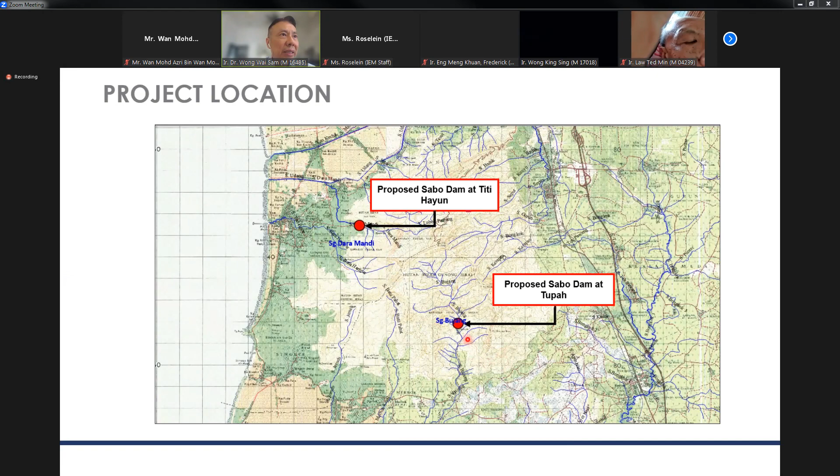So after this incident, the government proposed 2 locations to construct the Sabo Dam. One is at Titi Hayun, the other one is at Tupah. As we can see from the location, at Titi Hayun the river flowing through is Sungai Dara Mandi, while the Tupah Sabo Dam is for Sungai Bujang. So these are the locations for the 2 Sabo Dams.

The objective is to plan, design and construct Sabo Dam structures upstream of Sungai Dara Mandi, adjacent to Titi Hayun. Titi Hayun is a very famous resort area. Due to this incident, the resort area was closed for about 2 years; recently it opened up to the public again. The other one is upstream of Sungai Bujang, where there's a SADA water intake. So it's also a very critical location, to protect the intake from damage by debris and mudflow. These are the 2 locations earmarked by the government to implement this project.

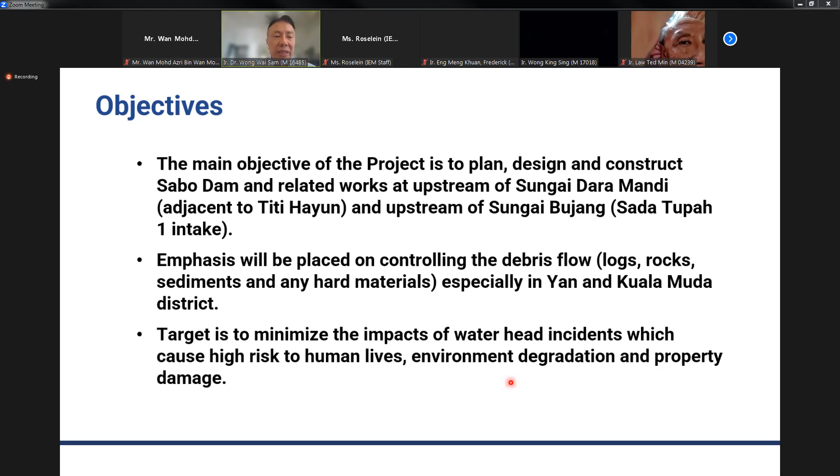The emphasis is to place structures to control the debris flow, including rocks, logs, sediment and any hard materials, from flowing downstream and causing major damage to the populated area. So the target is to minimize the impact of water head incidents, which cause high risk to human life, environmental degradation and property damage, as you can see from the photo just now.

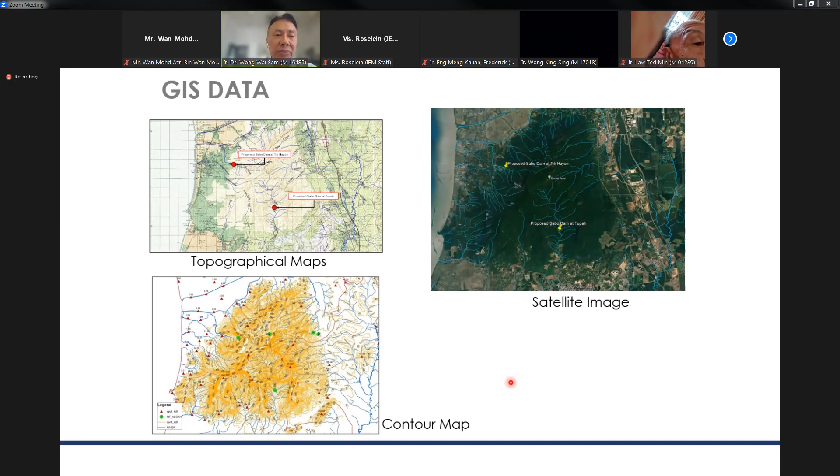Data collection, I think, is quite standard. We need to collect the rainfall data, then the satellite images, the topography maps and contour maps to get the catchment characteristics of the area where we are going to locate the structures. Then we fly a drone along the river corridor to check suitable areas, because the area is quite steep and not easy to access. So the drone helps a lot, where we can capture video and images to check the best location for the Sabo structures.

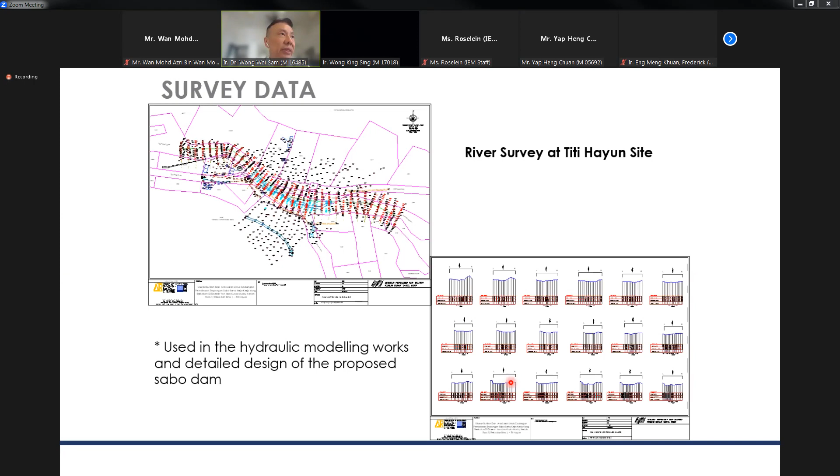Survey also: after we identify locations through drones, we do a ground survey, engineering survey, to get the cross sections and site survey for these two locations. Then also the SI, site investigation, to determine the soil condition or rock profile along the proposed location, later for the design of the foundation, and also to check for seepage problems if there are any.

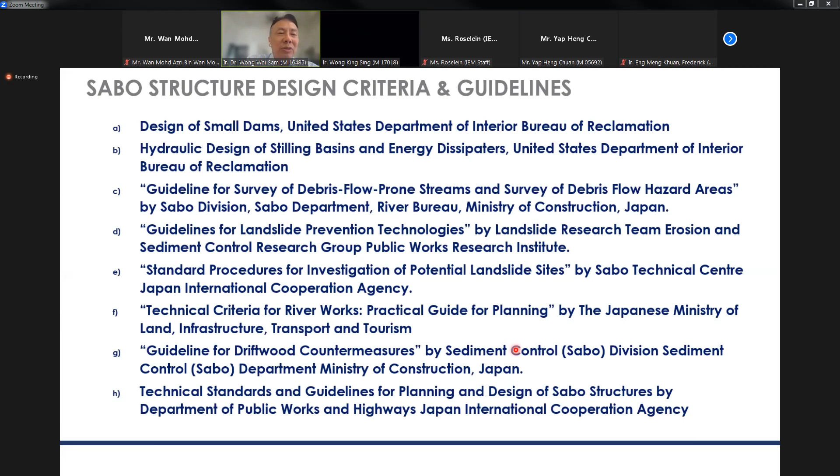Design criteria. I think in Malaysia there's still a lack of design criteria for these Sabo structures. That's why we refer to a lot of guidelines from overseas, especially from Japan. These are the guidelines that have been adopted or adapted to local conditions. Japan is quite famous for this. Sabo, the name, is from Japan, and the meaning is control of sediment.

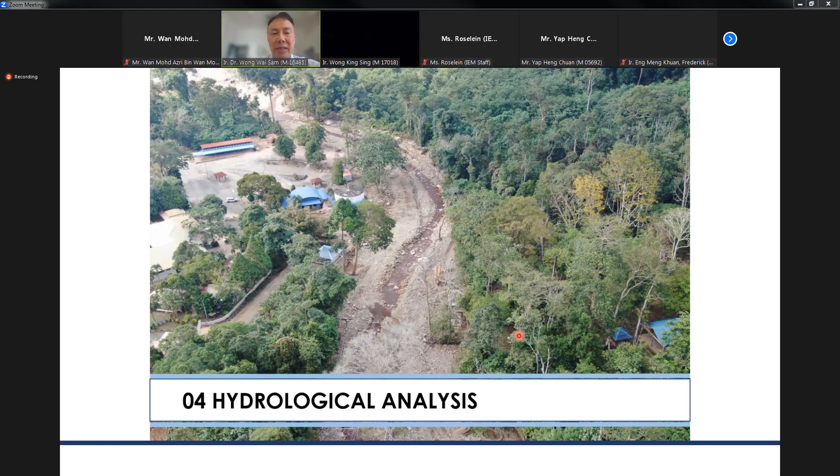So from all these data collections and the guideline, the first thing we need to do is establish the flow of water. So standard, I will go through this quickly. It's just to demarcate the catchment, then get the design rainfall intensity, then get the catchment characteristics. Then we use some hydrological procedure to estimate the runoff.

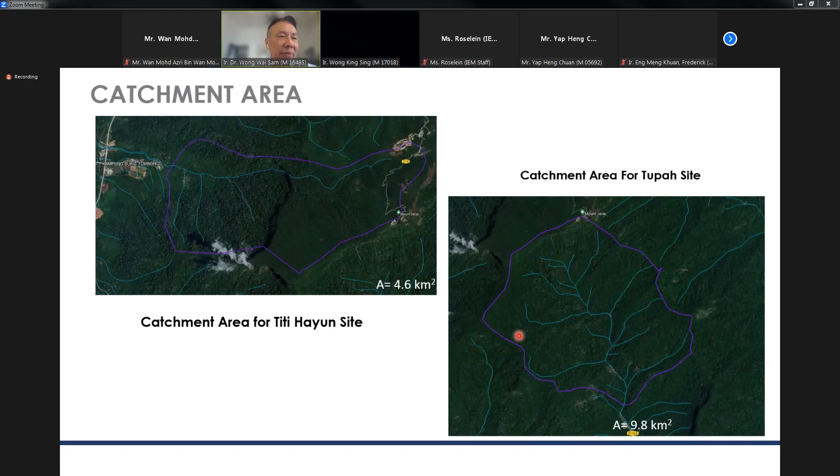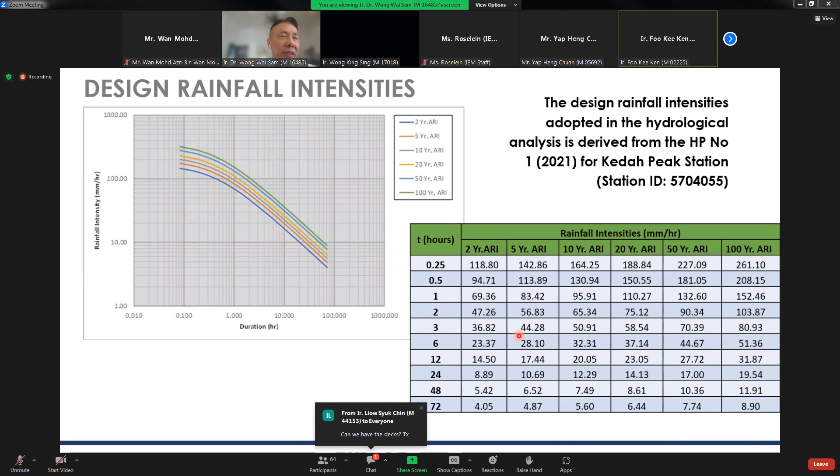Then for the runoff estimation, we have used two methods, HP5 and HP27. These are suitable for rural and undeveloped areas. I think you should know about this, HP5 and HP27, for those who have used it before. And the other one we adopted is the rational method proposed in the JICA guidelines, which we use to compare with HP5 and HP27.

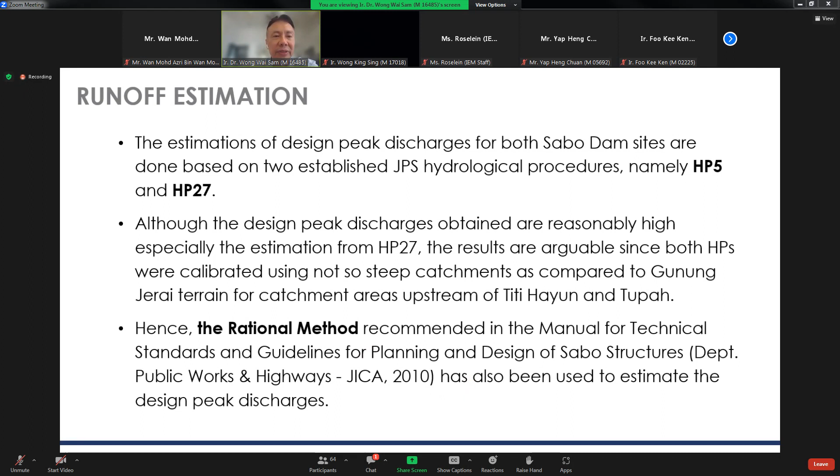From the computation, we can see that the rational method gives the highest flow peak. I think that is what most consultants will get also - if you use the rational method, normally you get a higher Q peak.

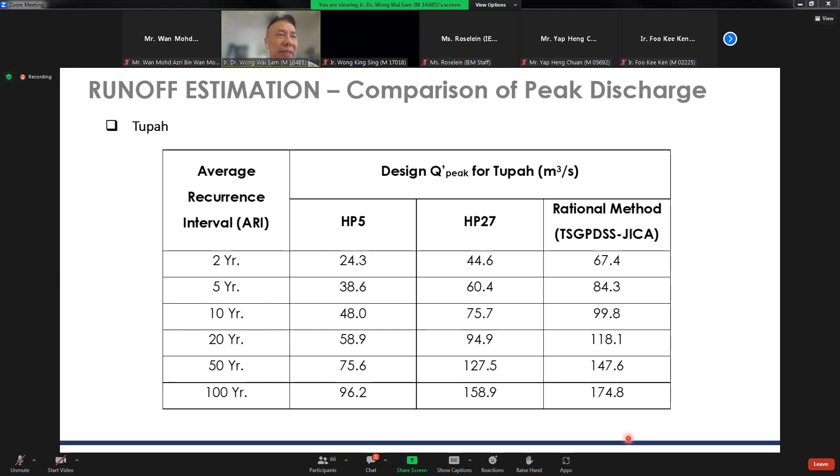So for Tupah, the same characteristics apply. This is the listing of the various return periods, and this is the Q peak from hydrological procedure number 5, giving the lowest. HP27 is in the middle, higher, actually much higher than HP5, but the rational method is a bit higher still. From the results, we can see that the rational method is almost 90% higher than HP5, and HP27 is lower by almost 15% compared to the rational method for the 100-year return period.

Actually, the rational method provides a higher Q because they adopted a runoff coefficient that is also high, as recommended in the guideline. There's a possible reason for this also - in Japan, most of the land use is very rocky because of volcanic type soil, not much plants or vegetation in the area there. So they recommend a high runoff coefficient - 0.8 was adopted in this case.

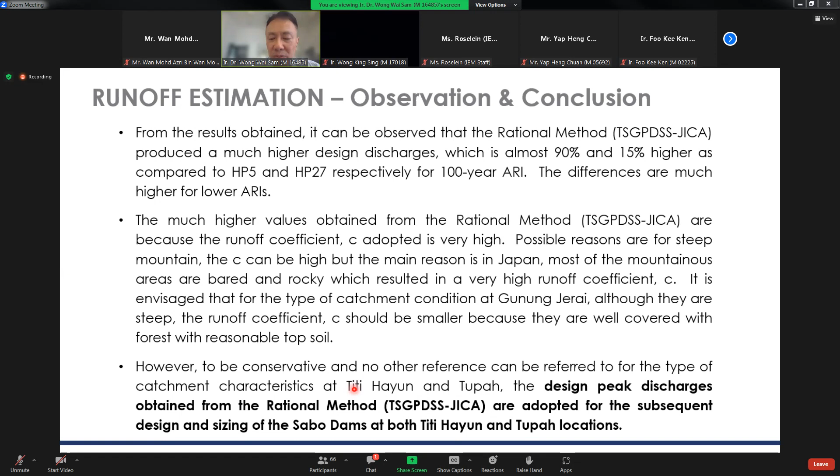But because of the uncertainty, in this design we have adopted the rational method as the higher value to design the sizing of the Sabo dams at both Titi Hayun and Tupah locations. Okay, Sabo dam sizing.

In this project, the recommended types of Sabo are closed Sabo and open Sabo. Just to explain a bit - closed Sabo means the Sabo dam is intended to trap the sediment also, but open Sabo is just to trap the debris and bigger size rocks. So in this case, we do not intend to trap the sediment, but only the debris like tree trunks and boulders.

So this is the function that was adopted - this design criteria was adopted in this design. And with this structure, it would not only trap the debris, but also reduce the flow rate. With a Sabo structure in front, the flow velocity here will be greatly reduced, and when it reduces, it will help to deposit sediment.

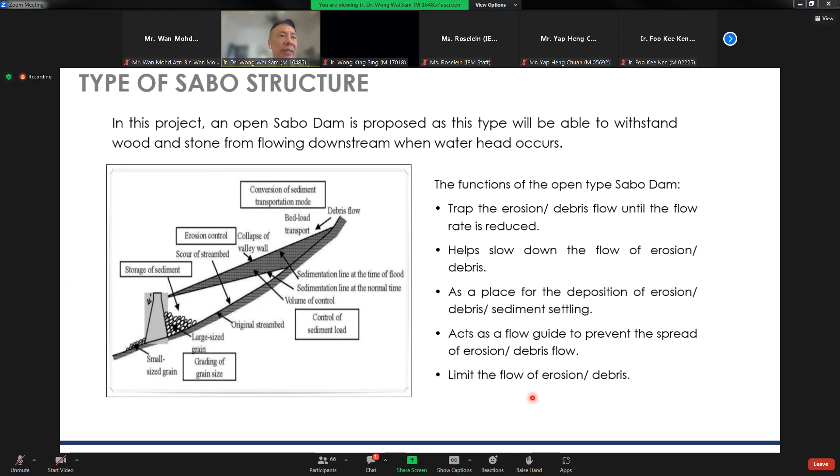Although it's an open Sabo, after a while the Sabo will also actually trap sediment behind it because it slows down the flow. So it acts also as a flow guide to prevent spread of the eroded area, eroded sediment, and also debris, and to limit the flow of the eroded material and debris. These are the functions of the Sabo.

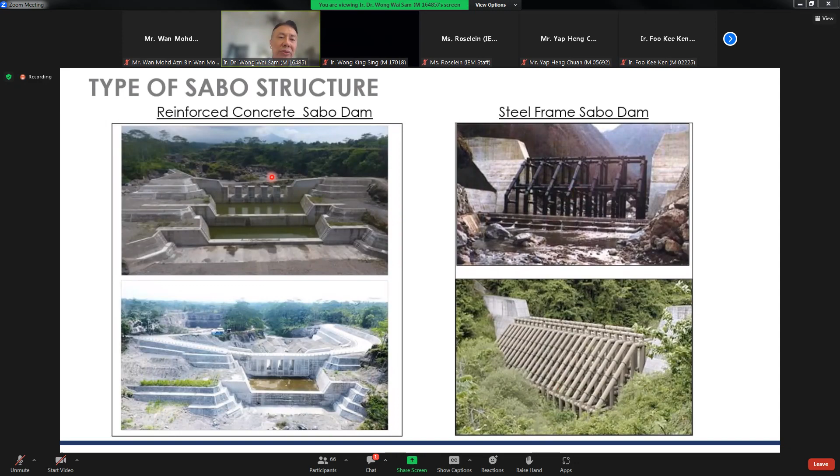So we also considered why we finally adopted the concrete Sabo. I think both are effective, but for construction cost, we estimated the steel Sabo will be a bit higher. And for structural stability, because the steel frame is light, we need a very strong foundation, whereas the RC Sabo also acts as a gravity dam to retain it, so in terms of stability, it's more stable.

Construction duration, I think the steel structure will be much faster because most of the members will be fabricated in the factory and then mounted at the site. Construction difficulty, I think steel structure may be a bit more difficult because you need to transport the fabricated steel columns or beams to the site, and it's quite heavy when you want to install it.

Debris maintenance is another issue, because you can observe the steel structures where tree trunks can be trapped in between. If trapped, it's quite difficult to take the debris out from the steel frame compared to RC structures. Wear and tear, I think steel is definitely easier to degrade because it's subject to corrosion.

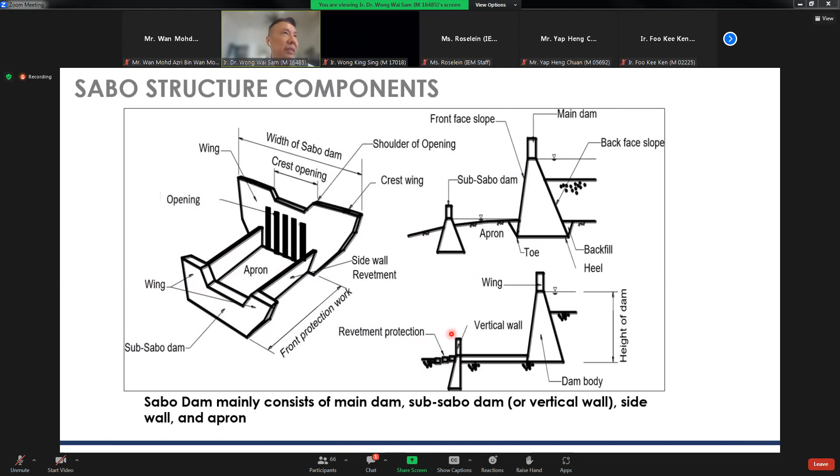This is basically the adopted Sabo configuration for this project. The first thing is to estimate the debris volume. I will not elaborate much, but basically we estimate the length of the stream, and there's a way to estimate the volume of debris and the collapsible volume that goes into the channel itself. From this we know the length of the stream, the width, and everything.

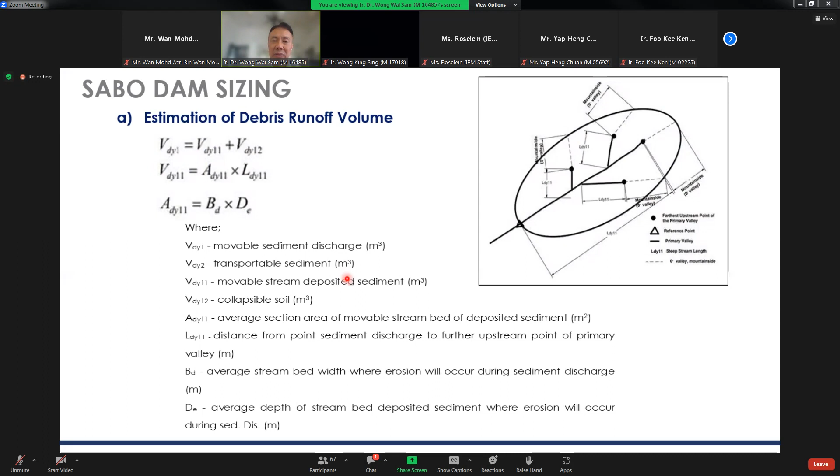From there, we actually estimate the volume of debris that will be going to this intended location for the Sabo. Definitely, the more data you collect, the more accurate the volume estimate is. But at this moment, we just base it on the stream length and these factors to estimate the volume of debris that is coming down.

Then the other thing is we need to estimate, after we know the volume of debris that will wash down from the event, the volume of the Sabo that can trap this volume of sediment, debris and boulders coming down.

So actually the location of the Sabo is very important. The more gentle the riverbed is, the bigger the volume available. That's why, as I mentioned, we have to do the drone survey to get a good location. The wider the river channel, the gentler the river channel, the bigger the area you can have for trapping.

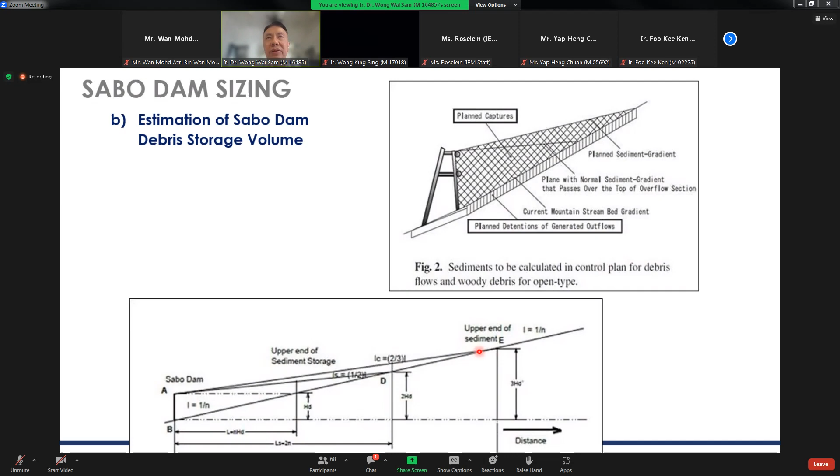Definitely, we assume that the Sabo will be maintained very well, where the Sabo has to be cleared whenever there's another event where debris has washed down. But sensitivity analysis is also carried out in case the Sabo is quarter filled or half filled or whatever - that can be done in the modeling part.

Then we actually estimate the spillway on top of the Sabo. We don't want the Sabo to overspill everywhere across the dam itself. We need to allocate a location where the Sabo overspills if the event is much higher, or if there's no time to empty the debris out. Then if it's full of debris and boulders, the water may overspill the Sabo dam.

So we design the weir accordingly, to compute what is the return period and estimated flood level - let's say in this case, it's 100 years return period - and what is the overspilling. We want the weir's downstream to be your apron, so that it controls the hydraulic jump or dissipates the energy when the water overspills the weir here.

And there we design the plunging pool, where actually when the water overspills, it drops into this apron rather than outside the apron. There's a formula to compute the length of the apron required, and the width of this apron and the sidewall will be based on the weir width that has been estimated from the discharge.

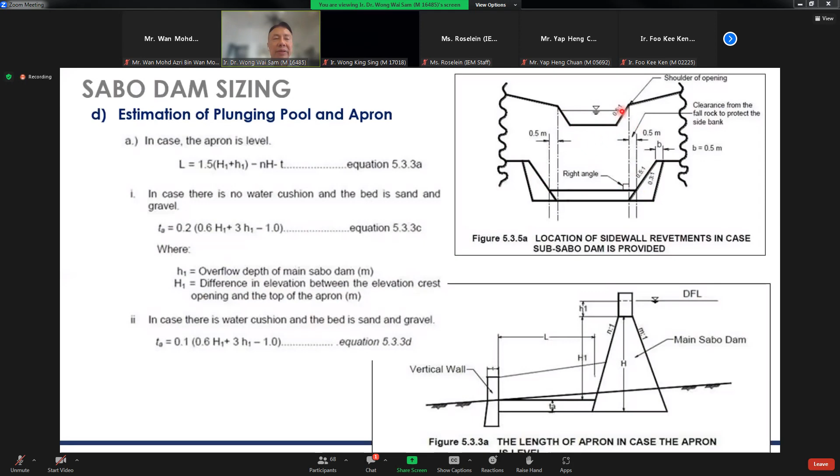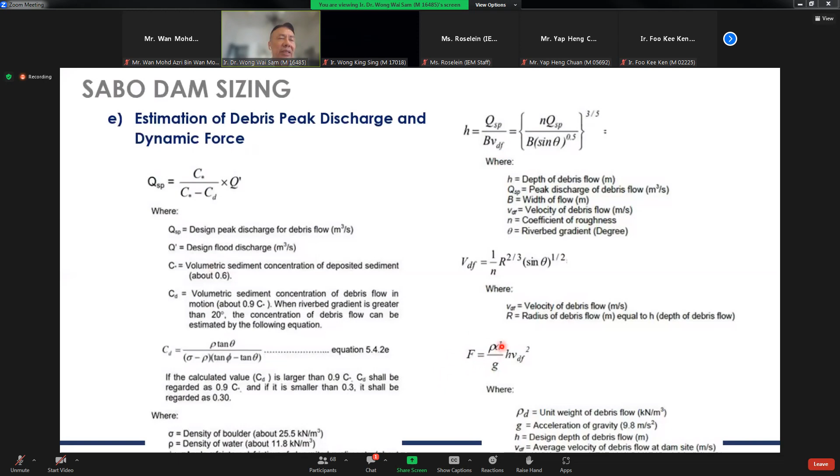This is the height of debris, the depth of debris estimated using the peak discharge, and this is the velocity of the debris flow. From there, the H and V with other parameters, we compute the force that acts on the Sabo structures.

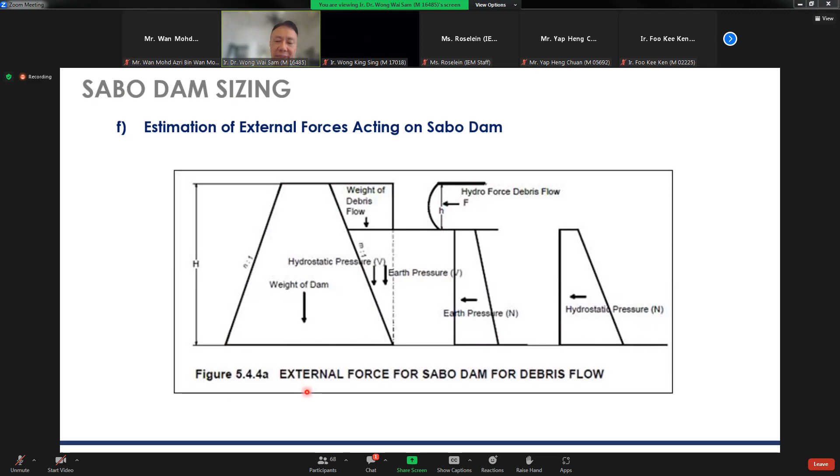After all this, we hand over to the structural engineers and geotech engineers to design the main structure and the substructure. So this is basically how we size up the Sabo dam. This dimension has been estimated from the formula and also the computational method, the guideline provided.

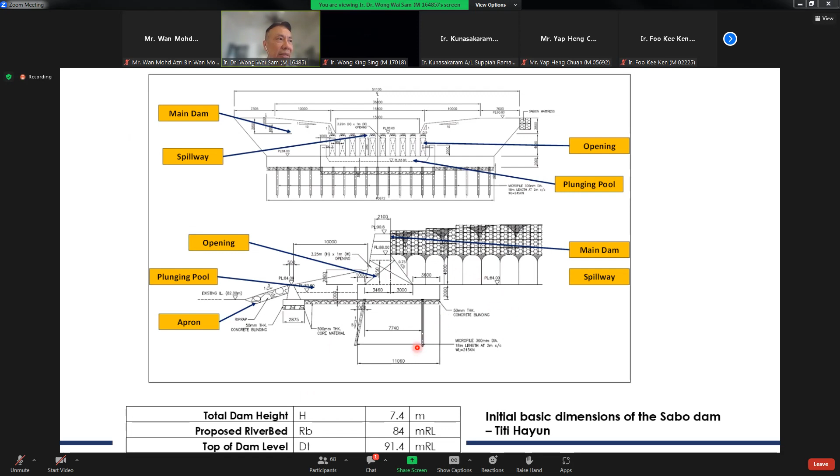This is for Titi Hayun and this is for Tupah. To summarize, the catchment area for Titi Hayun is this one. The dam height estimated is 7.4, based on the width of the river channel and also the volume required. Then we determine the height of the dam. The volume of debris we want to control and the width of the river channel at the location of Sabo determine the height of the Sabo dam. Then the proposed bed level, top dam level, what is the reduced level.

This is then the overspill weir, this is the overspill weir level. Opening, how many slots we want for the open Sabo. Then this is the storage volume available, 22,000 meter cube. For Tupah, it's bigger and higher the dam, this is the value. The storage volume of debris computed is 41,000 because the catchment is almost double that of Titi Hayun.

After we size up the dam based on the guideline provided in the formulation I presented just now, we also put into this model: we model the debris using the Kanako debris flow simulator. This software can be downloaded free from the internet. It's developed based on theoretical principles of debris flow and supported by laboratory experiment and field data from Japan itself, and there's a 1D and 2D model.

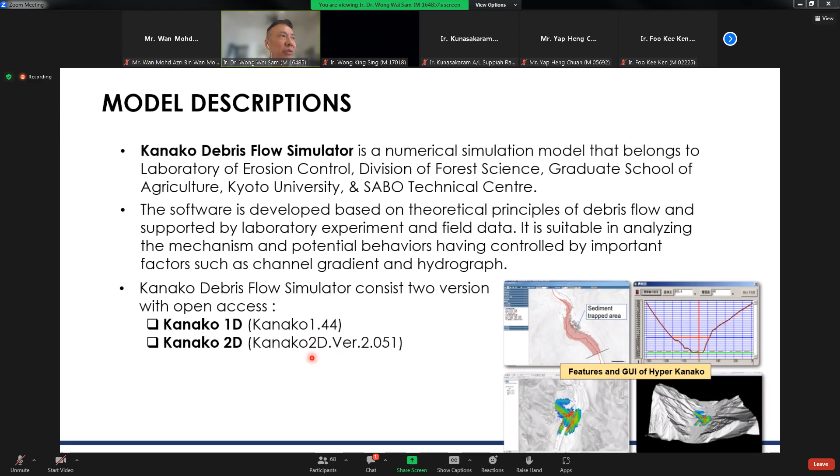The objective is to develop and carry out simulations using this model. The aim is to estimate the debris flow discharge along the slope, to verify the effectiveness of the designed Sabo dams at Tupah and Titi Hayun. That means, having sized it out just now, we then use this model to check how effective it is to retain the debris.

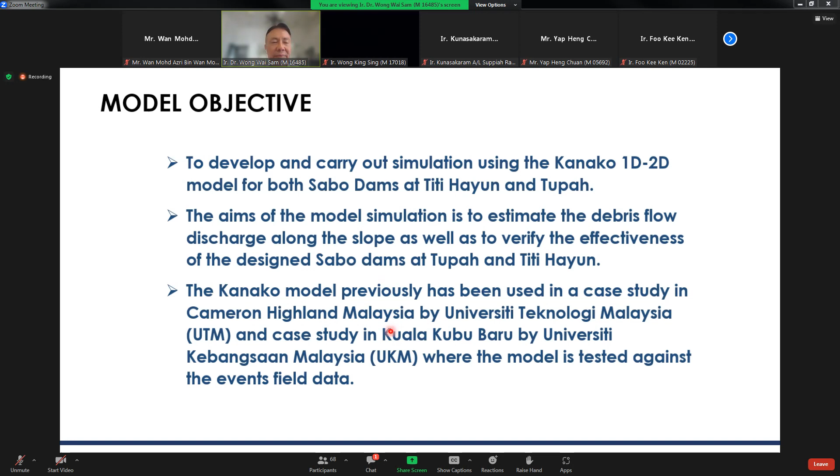This model has also been used by UTM for the Cameron Highland studies and also by UKM. So basically, the flow chart for this Kanako modeling is: we need to know the landform, as mentioned. We need to know the cross section, the view, and all these things along the stream itself, and also at the Sabo structures. Then, after the landform, we set up the model itself.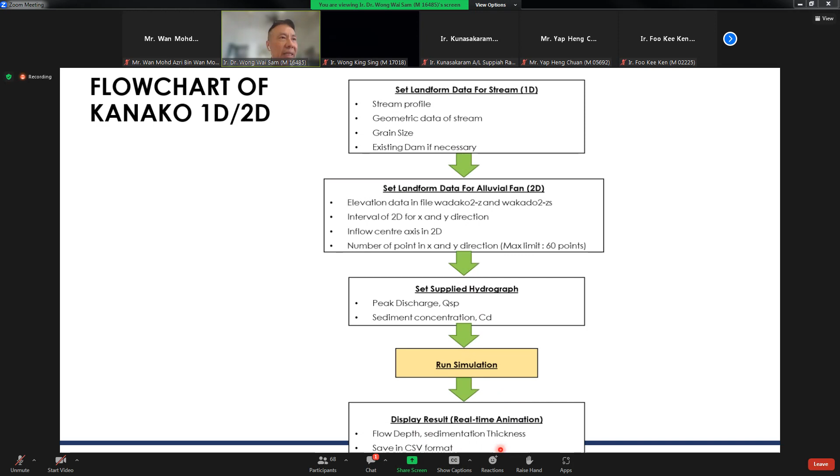Then we also apply the hydrograph, that means the peak discharge and the sediment concentration, the debris flow concentration. Then we run the simulation, and from there we get the flow depth and sediment thickness. That's the results, and this is the input.

This is all the input, all from the survey itself. Then this structure is what we just computed. Then with the hydrograph, we put it in. We supply the initial thickness of the movable bed. This is all estimations from the site investigation. We estimate how deep the sediment thickness reaches the hard ground, then the points we want to estimate the flow.

Then we see the output, which is the discharge hydrograph displayed. Later I'll show you the results. So this is the setting up of the model, the 1D model and 2D. Just now, this is for the Sabo observation location. We have two locations: one is Sabo, one is upstream of the point, and the other one is downstream of the point.

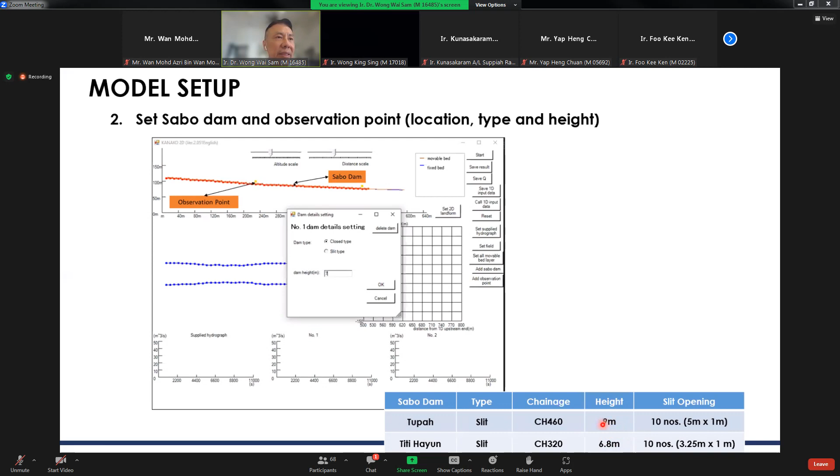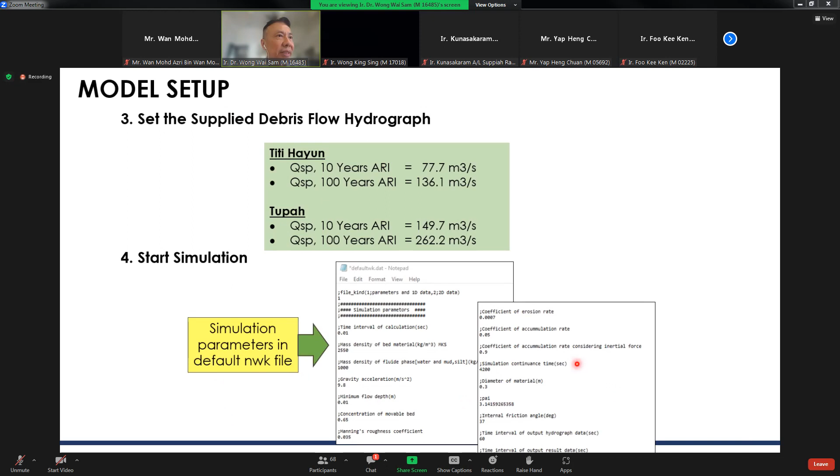To compare, we put in all the height of the Sabo dam as we actually estimated just now. From there, we put in the discharge for 10 years and also for 100 years, as computed by the formula just now. This is for Titi Hayun, this is for Tupah. Then we put in the simulation parameters, and from there the results come out for 100 years and 10 years.

Okay, we can see that for Titi Hayun, this is for 10 years. The upstream of the Sabo, this is the hydrograph coming down. And after the Sabo, it becomes from almost 15 meter cube per second to 6.

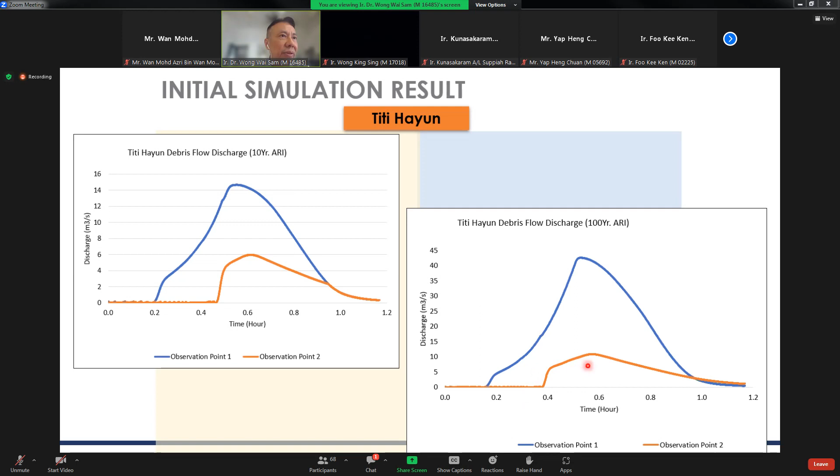For 100 years, it retained more because I think it's an open Sabo, from 43, 42 meter cube per second it can reduce to 10. Okay, these are the results. For Tupah, I think it's a similar observation.

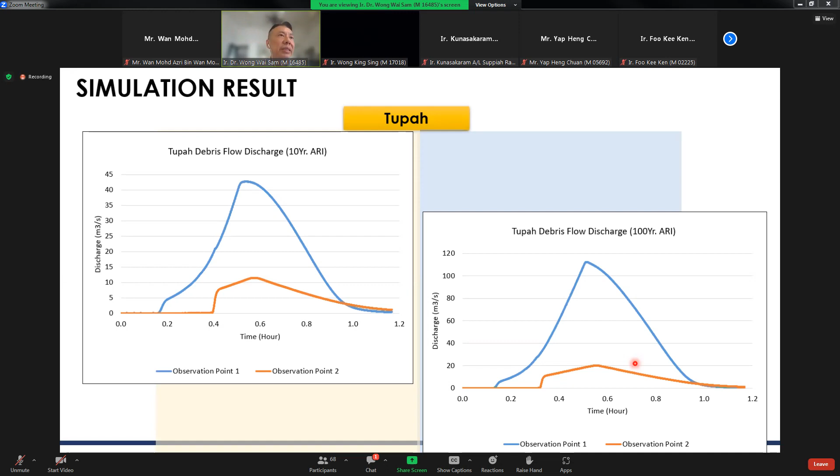You can also observe that the percentage of reduction of the debris are even higher. The models have demonstrated that with the implementation of Sabo structures at the proposed site, the debris flow discharge at the downstream stretches of the river can be greatly reduced. Let's say a similar event happens again after the Sabo structure, the debris discharge from the dam can be controlled and reduced to manageable levels.

This modeling can also be used to do some sensitivity analysis. Let's say the Sabo is half full. We can change the landform of the model by filling up the upstream of the Sabo with some sediment to increase the bed level. Then we can see how much it can trap if it's half full, quarter full, or so. The modeling can simulate situations that provide some indication if maintenance cannot be done, what the consequences can be if it's half full, quarter full, or three-quarter full.

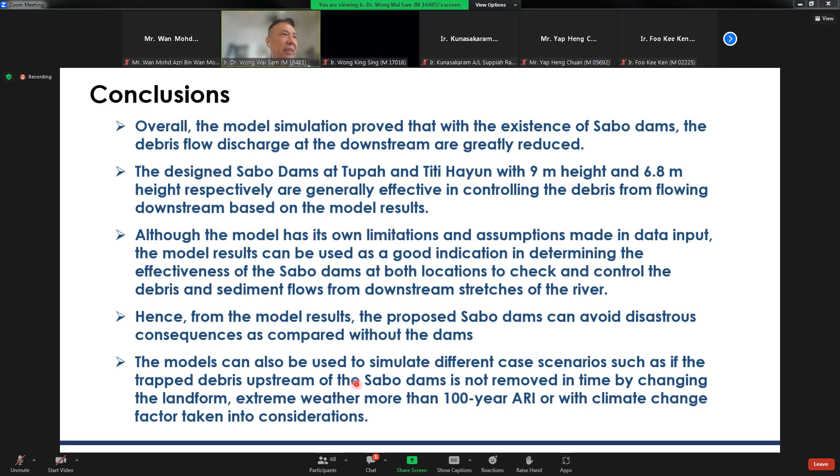As mentioned, we can also simulate for different scenarios, or even climate change.

Here we just want to show some layout of the completed structure itself.

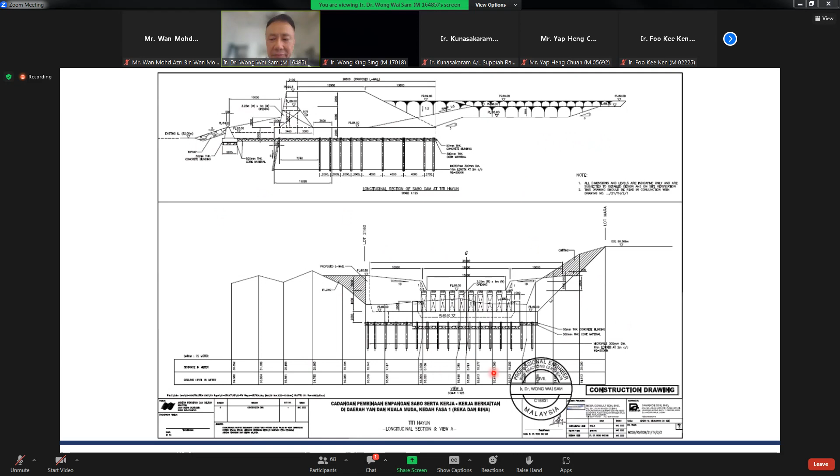And this is for Tupah, a similar configuration. But for Tupah, as I mentioned, there's a Sada water intake. Last time, without the Sabo, it was located around here. But with the Sabo, we actually created another storage for the Sada water intake downstream of the Sabo dam, so that this intake will not be damaged by any debris flow, because it's controlled by the structure itself.

And we created a pool at the side here, where in normal times water can, from this plunge pool, add additional storage for water supply purposes also, with these support structures.

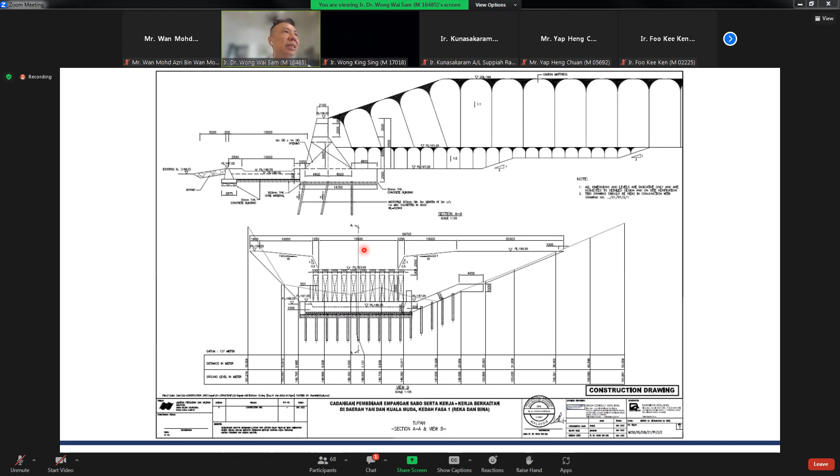This is a section and front view of the structure itself, and this is the completed structure looking upstream. We are standing downstream looking upstream. This is the apron. This is the open Sabo.

I think this is Gunung Jerai up there. And we have some telemetry, siren, and warning systems also.

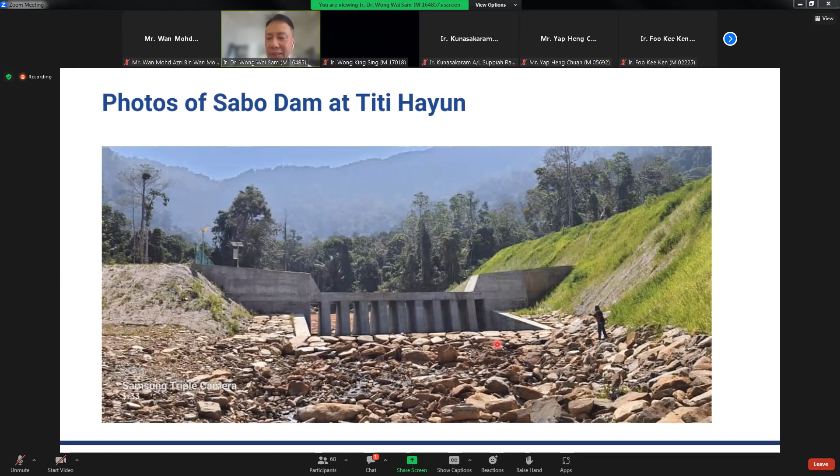This is from upstream looking downstream. This is the storage area of the Sabo.

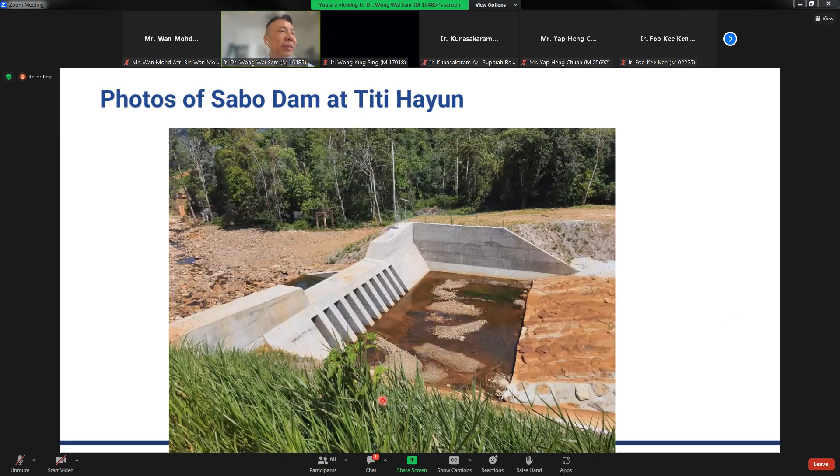And this is another view, standing on the left bank of the river. Okay, this is the downstream and this is the upstream. Okay, and this is Titi Hayun. As mentioned just now, there's a pond here created for Sada water intake.

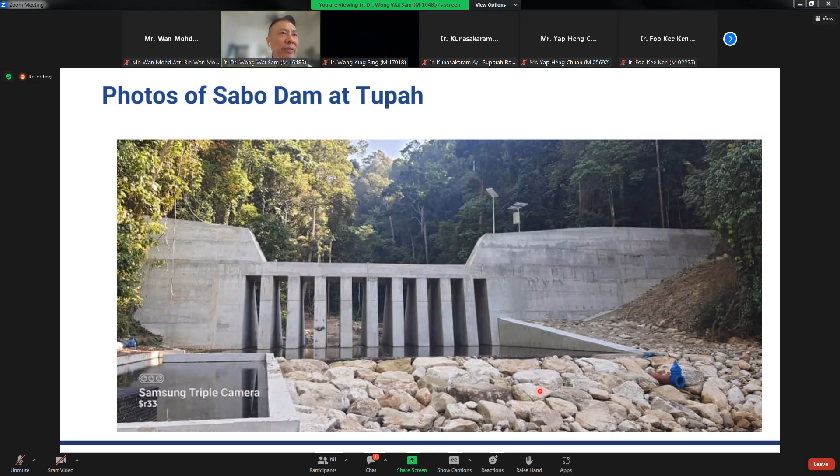Okay, this is the telemetry system. We also have a monitoring system for the integrity of the structure. If there's a big movement, then I think it will be detected. So this is the apron, and downstream of the apron will be protected by riprap. This is a plunge pool, and this is looking from upstream to downstream.

So basically, this concludes my presentation. Thank you for your attention, everybody. I hand over the floor back to Engineer Chow.

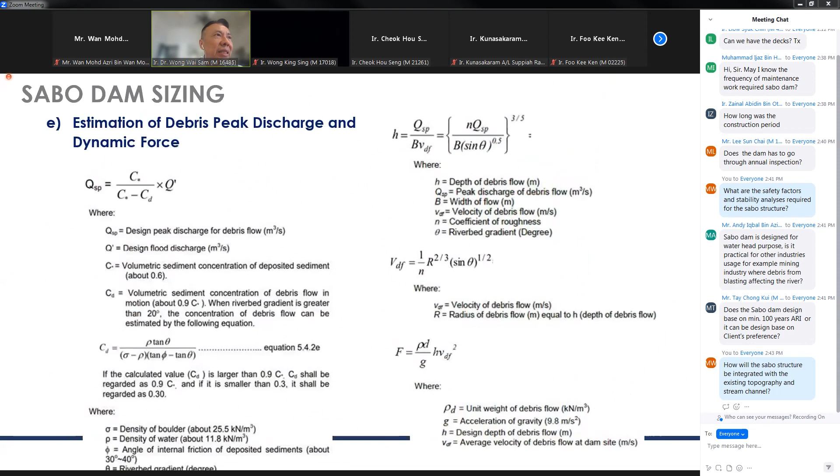And on top of that, let me just go back to the forces. There's also a dynamic force acting on the structure itself. So this is the most critical force. These are the forces recommended to be considered in checking the stability of the dam itself: the hydro force of debris, which I just showed you the formula for, then the weight of the debris, the earth pressure, hydrostatic pressure. All these act to compute the requirement for the stability, overturning and sliding of the dam itself.

Okay, thank you. We move on to the next question from Mr. Andy Iqbal. He's asking, Sabo dam is designed for water head purpose. Is it practical for other industries' usage? For example, the mining industry, where there's debris from blasting affecting the rivers. I think definitely, because Sabo structures are designed for whenever there's heavy runoff from a catchment that consists of a lot of loose material.

For the mining industry, you don't need a massive concrete structure. We call it Sabo structures; they don't need to be very big. It's just like when you design your sediment trap. You can control at source with a smaller one. There's something in the market like a cage, but you need to anchor it properly to hold your boulders and rocks from going downstream of the river. There are smaller Sabo structures, not dams, to control the debris from smaller catchments.

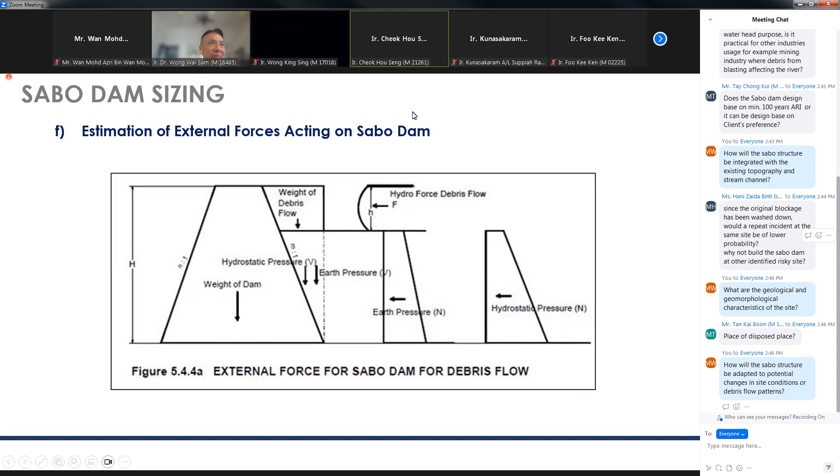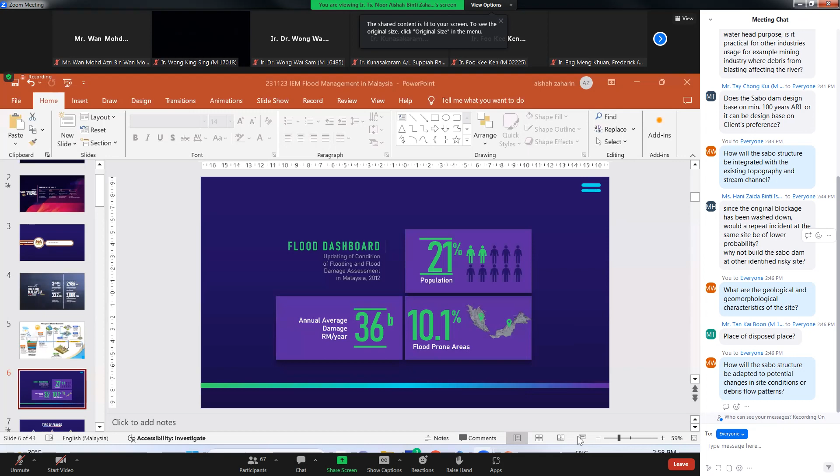This is the synopsis of the topic. Rainfall has increased recently and the frequency has skyrocketed. So climate change has been impacting flood management in Malaysia. And of course, rapid urbanization is leading to increased runoff. There are many different approaches in managing floods, from conventional structural measures to the newer, greener, eco-friendly, non-structural measures and blue water body solutions.

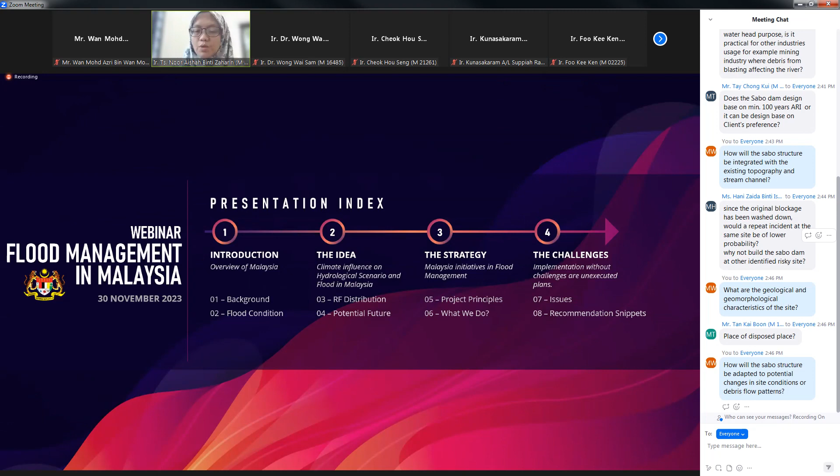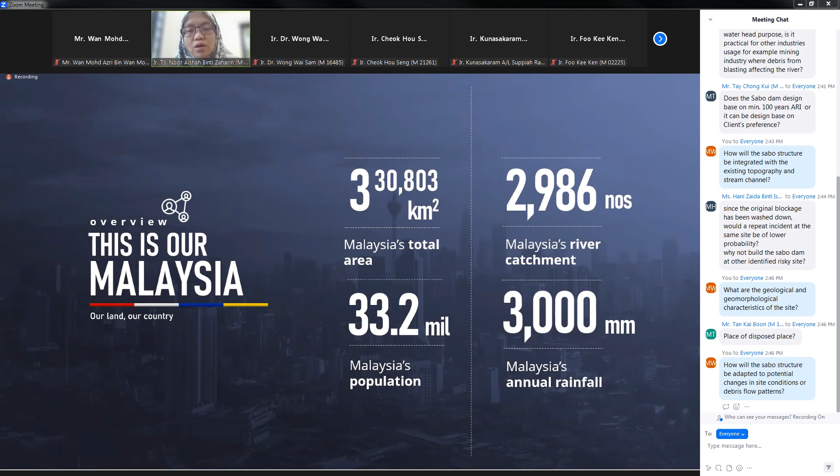So this is Malaysia, our land. Our total area is about 330,000 square kilometers, with 33.2 million population. We have about 2,986 river catchments and annual rainfall of 3,000 millimeters per year. That is a huge amount of rainfall that falls in our country yearly.

So this is where the rainfall goes. 971 billion cubic meters of annual rainfall, which is about 3 times the global average. This is very much affected by temporal and spatial factors. 412 billion cubic meters went off through evaporation, 61 billion cubic meters goes to our groundwater recharge, and the balance of 494 billion cubic meters, which is about 51%, is the surface runoff that we have to manage.

So of this surface runoff, 17% is being taken up by dam storage, but being released back about 1.2% from WTP. This is based on the SPAN study, and this 51% of the balance flows through our 2,986 river network, and 29 of our rivers are polluted based on the latest EQR report last year, and 80 to 85% of the surface water is released to the sea. So this is basically what we have to manage when we come to flood.

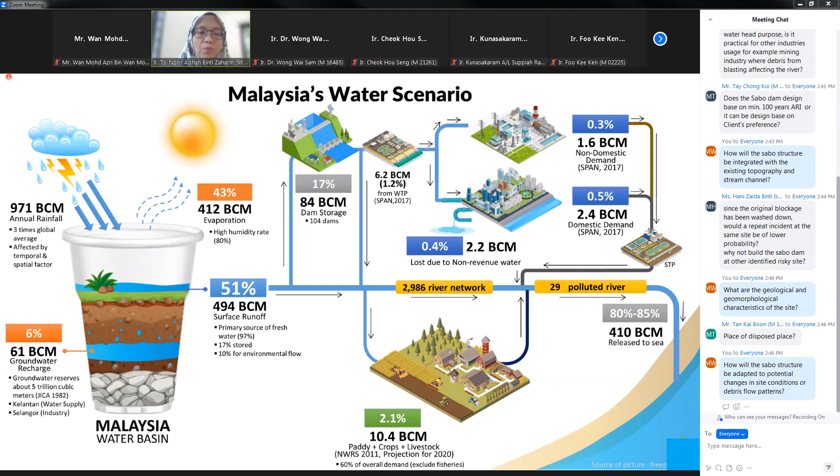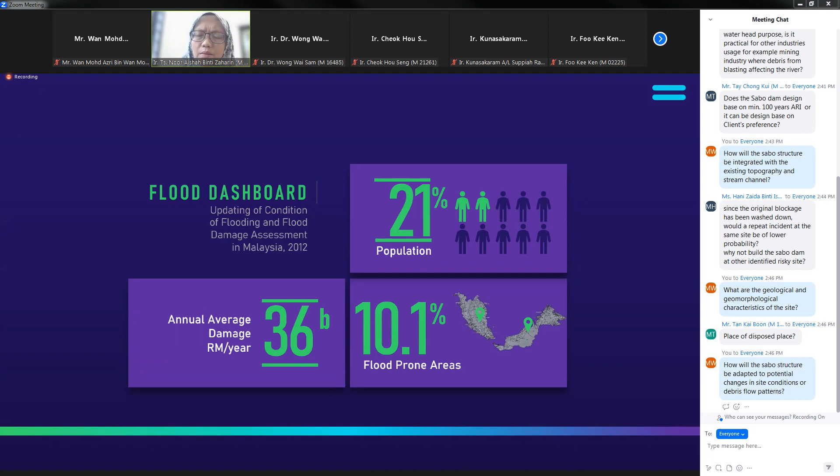So what are the types of floods that we have in Malaysia? The first one is the famous one, the monsoonal flood, which is the seasonal flood due to long duration rainfall during the northeast monsoon, which is currently happening in our East Coast area, Kelantan, Terengganu, and Pahang, and parts of Johor. Next is flash flood. This is very famous in Malaysia, in KL, in Shah Alam. This is due to high intensity, short duration rainfall that occurs mostly in urban areas, coupled with inadequate drainage and storage systems. And finally is coastal flooding due to backwater effect from tidal influence affecting the lower reaches.

Okay, major causes of flooding. We can classify the major causes of flooding into two. The first one being man-made, which we can try to mitigate, and the second one is the natural causes. The first one being land development. The more land we open, we increase the discharge, we increase the surface runoff, floodplain encroachment, changes of land use, land is getting more impervious. So this all contributed to increased discharge, hence more flooding in Malaysia.

Secondly is river obstruction. We can see there are some bridges with very low soffit level. It actually disturbs the water flow. We have structures in rivers. We have pillars in rivers, MRT or LRT pillars are in rivers, as well as rubbish. Rubbish also causes disruption in our river flow.

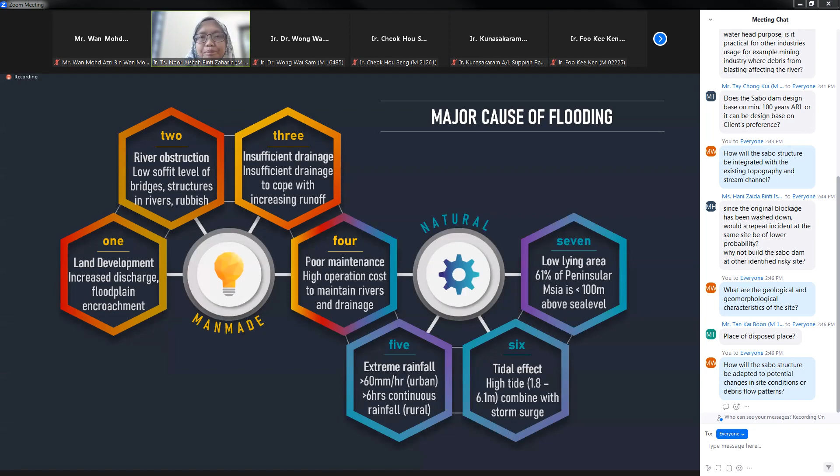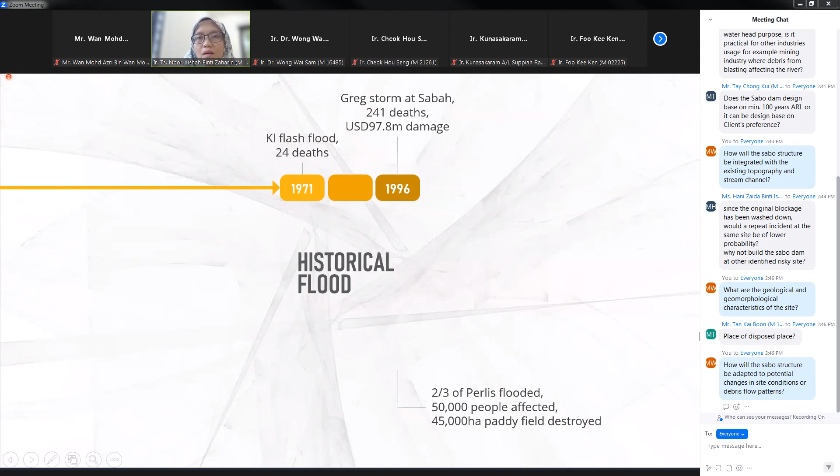So let's see a little bit of the historical floods. 1971, we had the KL flash flood with 24 deaths. This is the start, where the Department of Irrigation and Drainage was entrusted to manage flood in Malaysia. Before this, DID was focusing on irrigation, more on agriculture. So due to the 1971 flood in KL, DID was entrusted to manage flood in Malaysia. Then we have in 1996, the storm in Sabah, 241 deaths with 97.8 million of damages.

We have in 2000 the flood in Kelantan and Terengganu with 15 deaths and 100,000 people affected. 2006 flood in Johor with 18 deaths, 489 million in damage. 2008 flood in Johor, 28 deaths with 21 million in damages. 2010, where 2/3 of Perlis was flooded, 50,000 people affected and 45,000 hectares of paddy field destroyed. I believe this flood is very, very significant to most of us: the yellow flood in the East Coast back in 2014. We recorded 25 deaths with 500,000 people affected, causing about 750 million USD in damages.

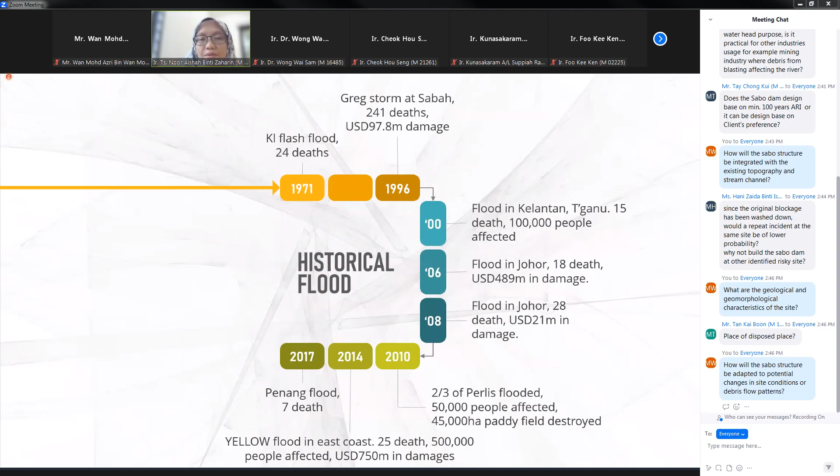2017, Penang experienced the worst flood with 7 deaths. 2021, the KL, Selangor, and Pahang flood - if you remember Shah Alam, this was one of the worst floods that hit that area in 2021. This flood prompted the project Tebatan Banjir Berkeutamaan Tinggi that we are currently working on now.

2022, last year, there was a flood in Rantau Panjang, and we have yet to see what's coming this year for Malaysia.

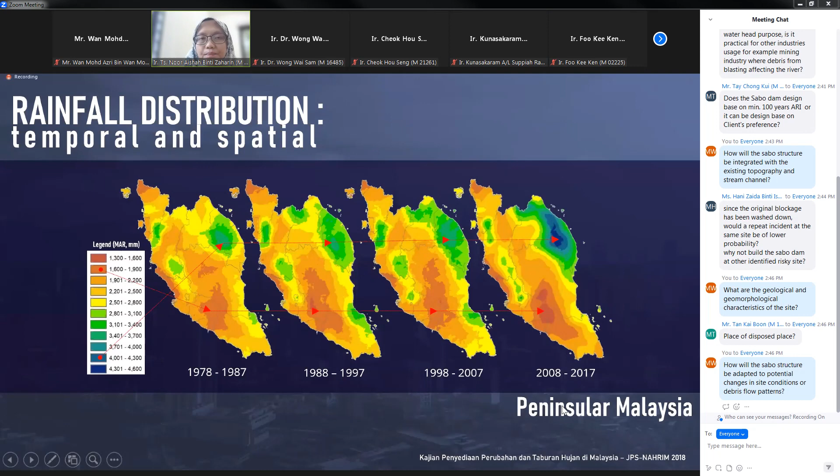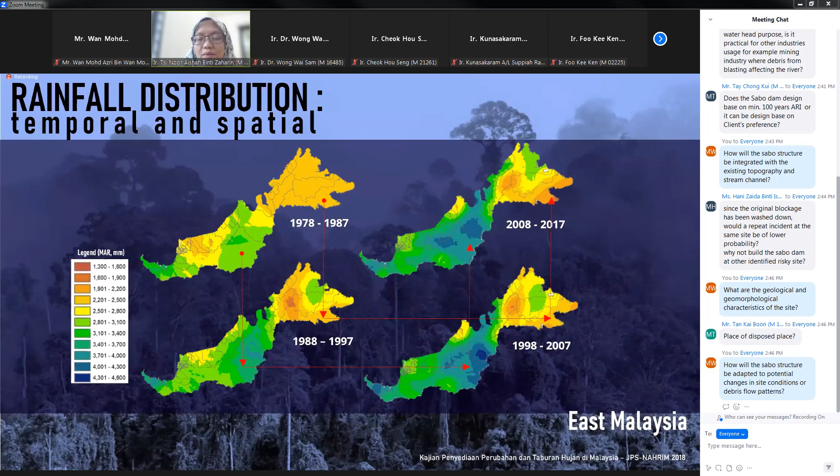A significant increase can be seen in Sarawak from 1978 to year 2017. This is based on Kajian Penyediaan Perubahan dan Taburan Hujan di Malaysia, a study by JPS and NAHRIM back in 2018.

So you can see the trend nowadays - the rainfall is getting heavier. Smart tunnel operation is increasing from year to year. So we can see that it's getting wetter in Malaysia.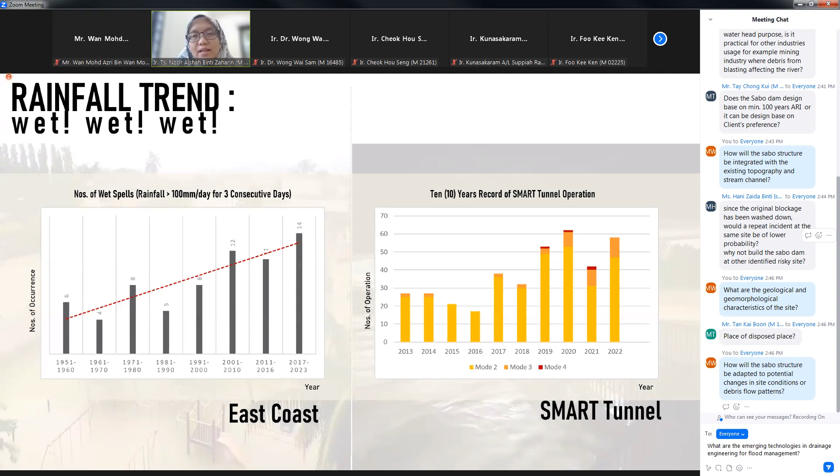Okay, what is the potential future? Based on a study conducted by Nahrim, it is expected that the temperature for Malaysia will increase, and the rainfall distribution will also increase - up to about 32% for the northeast area, about 2.9-3% for the southern area, and at our central area, about 8% increase in terms of rainfall.

So more rainfall means more water that we need to manage, more surface water that we need to manage. And if no flood mitigation projects are in place, we are expecting more flood to come.

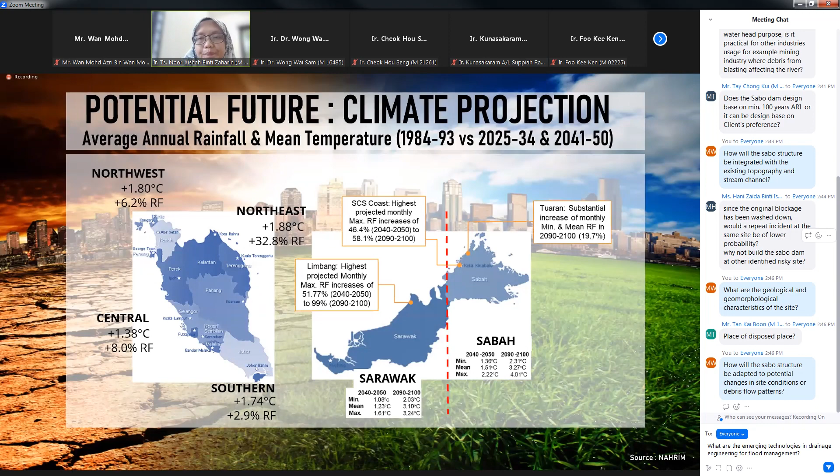So what is the strategy being upheld by JPS? We hold to these 4 principles. The first is we would like to create for resilience. Number 2, it's good to build with nature. Number 3, we have to bring back our beaches, as that would be the damper for storm surge and high tide. And most importantly, we have to make room for water.

We have to respect the room that the water needs. We are not against development, but we have to understand that rivers will try to find back their route, and that is the reason why we have to make room for them.

So when we talk about creating for resilience, we have disaster risk reduction strategies. We have to build better structures and include climate change factor, CCF, in design. We also consider higher ARI in certain areas where budget permits.

Second, for building with nature, water is prioritized. Water must be water-centric - it should be treated as the catalyst of economy. We also have to reconsider our method of construction. Let's try circular construction, whereby we should go for zero waste.

Next is the introduction of river trail. River trail aims for better guardianship of our rivers, so as to reduce river reserve encroachment and also enhance river corridors. These are all intangible effects - economic blooms in that particular area.

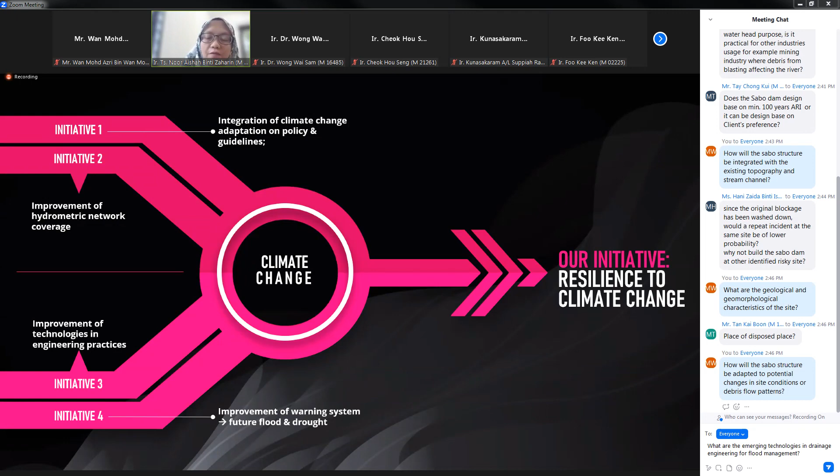Because we have to understand that in some areas, not much can be done in terms of flood mitigation, but we can try to create resilience among the communities to face flooding and drought. So, okay, what do we do?

Firstly, we look into the policy, integration of climate change adaptation in policy and guidelines. Back in 2009, we had a policy statement to ensure climate resilient development to fulfill national aspirations for sustainability. This particular policy instrument harmonizes and integrates with national priorities, measures on CCA, mitigation and DRR. It consists of 5 principles, 10 strategic thrusts, and 43 key actions. I'm not going to elaborate more on this.

We also have Malaysia's second national communication to the United Nations Framework Convention on Climate Change, UNFCCC. We have agreed to prepare a report periodically on national greenhouse gas emissions and measures taken to address climate change. So in 2022, 8 initiatives have been declared by the Malaysian Climate Change Action Council.

The first one is the implementation of high priority flood mitigation projects, or in Malay, Projek Tebatan Banjir Berkeutamaan Tinggi. We are very busy doing this at the moment. Next is the long-term solution on flood mitigation, urban drainage and coastal infrastructure construction.

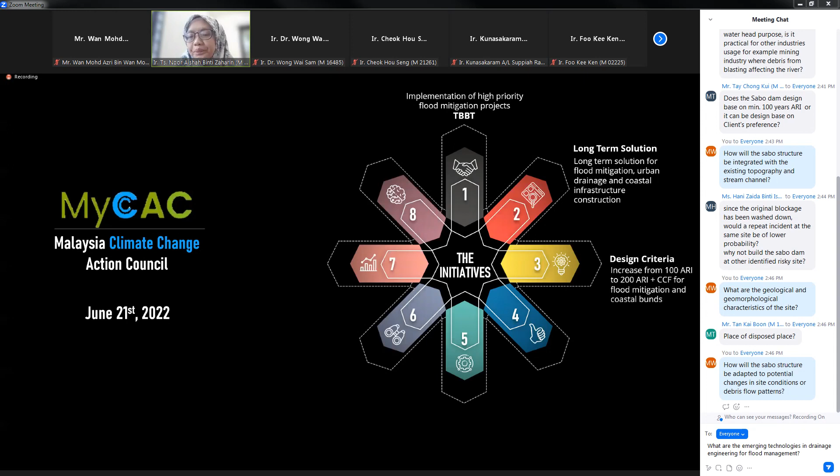We also look into increasing the design criteria from 100 ARI to 200 ARI with CCF for flood mitigation and coastal bunds. Off-river storage, construction and upgrading of dual function off-river storage.

Next, on the plans and guidelines, DID has been very active preparing various studies of integrated river basin management plans, Plan Induk Saliran Mesra Alam, National Water Balance, Flood Hazard Maps, Flood Risk Maps, and Integrated Shoreline Management Plan.

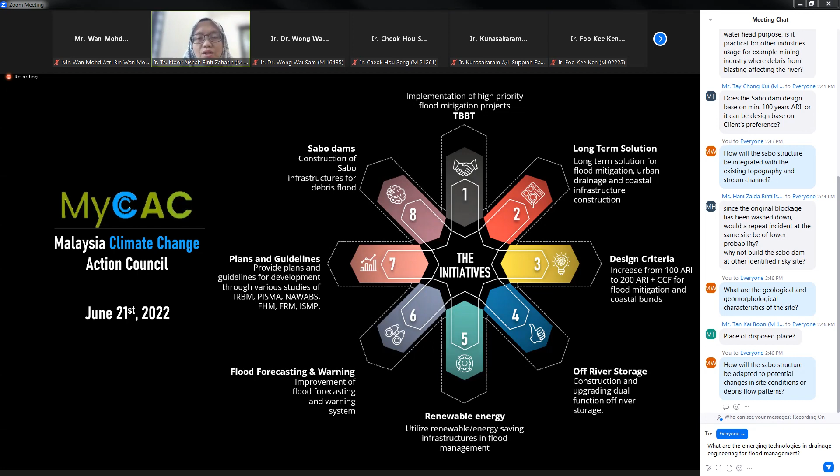And finally, just like what Dr. Wong presented just now, construction of Sabo infrastructures for debris flood.

Okay, the federal government through budget 2024 has announced allocation of 11.8 billion to conduct 33 high priority flood mitigation projects. Most of these TBBT projects will be managed by DID, but other agencies involved are Malaysia Water Supply Division and RCC. We target that this project will be completed by 2030.

We are in the midst of tendering. Some has been awarded, some are at the tender board, and some are on the way. And the guiding principle for TBBT projects - some of the projects, the flood protection will go up to 200 ARI.

We are encouraging nature-based solutions. We combine the gray and green solution - gray reflecting the structural and green reflecting the nature-based solution. We are promoting retaining water at source by utilizing detention ponds, multi-usage of detention ponds, and all this project must be completed by 2030, as mentioned before.

So let's see a little bit on construction of Sabo dams. Completed 2 numbers and another 22 numbers are being planned to be constructed.

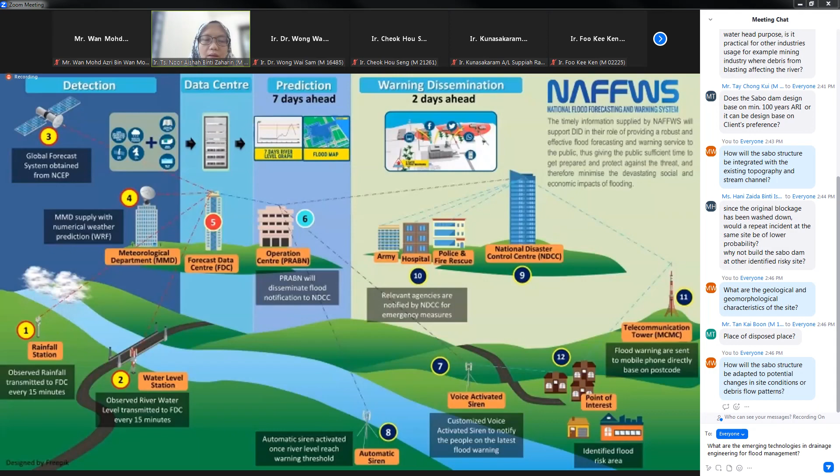So to improve our flood forecasting and warning system, we have increased our hydrological stations. For example, equipment and systems are being upgraded. We have about 1,458 stations. We increased our rainfall stations from 443 to 1,100, water level stations from 320 to 650 numbers. We have soil moisture, 50 numbers, and evaporation stations, 20 numbers.

But if we compare our rainfall station coverage ratio compared to Bangladesh and Japan, we are still far away. We have to catch up to increase our accuracy in flood forecasting. We have to increase our rainfall station coverage.

Next, we have preparation of flood hazard maps. So what is the process? A flood hazard map is actually a map that we produce to show potential areas that will be flooded under certain and various ARIs. We produce this map using hydrodynamic modeling and 3D data, and we demarcate the potential flood area and flood depth at various ARI based on current and future land use, together with and without flood mitigation projects, so that we can see whether our flood mitigation projects will bring good outcomes to that particular area.

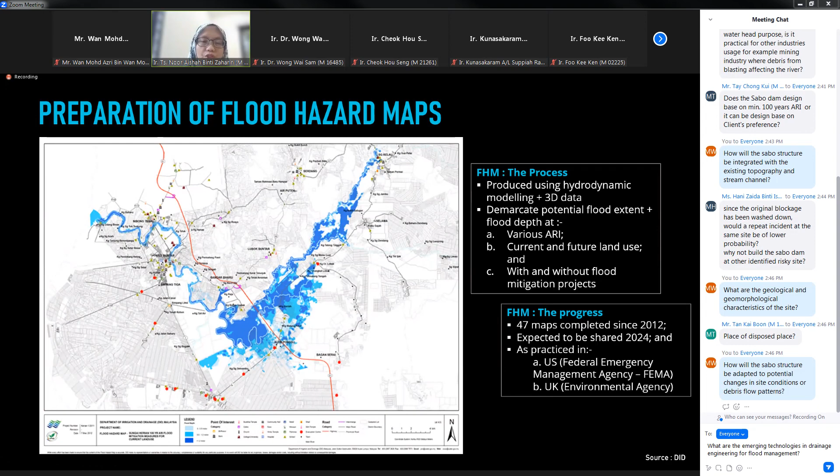Next is looking into re-strategizing operation of dams. For example, in November 2021, TNB reduced their water level in hydropower dams to provide extra storage capacities for upcoming flood during monsoon season. This is also to promote gradual release to avoid gushing of water flowing downstream and getting worse during the monsoon. We also do the same thing in Rantau Panjang.

There is a kolam uban there. We have discussed with KADA to reduce the water level so that we can provide more storage capacities to face, or to get ourselves prepared for, the upcoming flood in the monsoon season.

Next is communication, education, and public awareness. Information sharing is very vital. So JPS has this website you can have a look at, www.publicinfobanjir.water.gov.my, whereby on this particular website, you can get a live feed on rainfall and water level information. This website will also disseminate warnings for flood forecasting and landslide risk information at selected locations. Feel free to visit this particular website for more information.

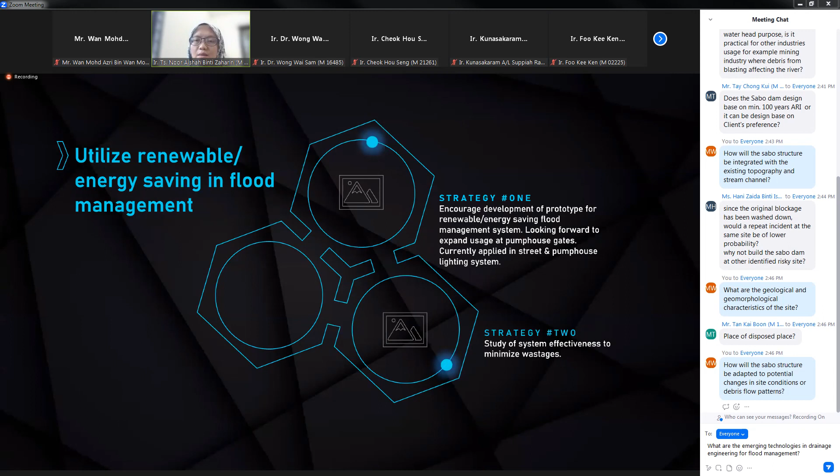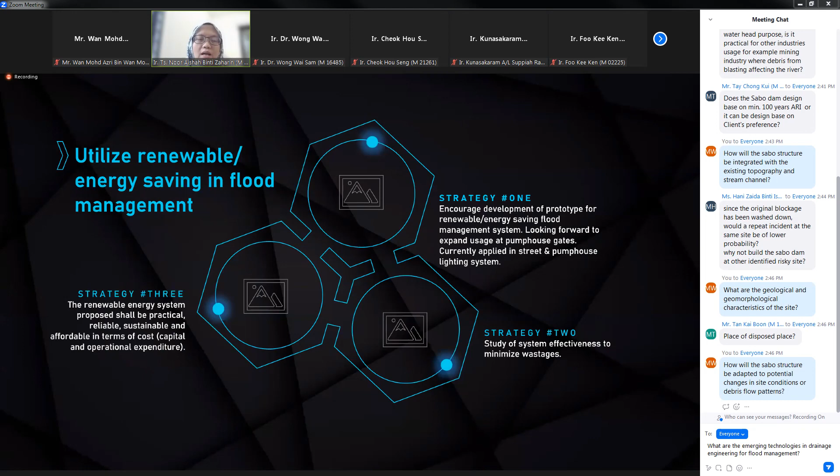Next, we also look into utilizing renewable and energy saving in flood management. Strategy 1: we encourage development of a prototype for renewable energy saving flood management systems. We are looking forward to expanding usage at pump house gates, currently applied only in street and pump house lighting systems. Next, we are studying the system's effectiveness to minimize wastages. And number 3, we have to ensure that the proposed system must be practical, reliable, and sustainable, as well as affordable in terms of cost, capital, and operational expenditure.

Then in 1971, after the KL flood, there was a catch-up plan. We tried to manage flood in rural and urban areas through implementation of structural projects. This was when the Hydrological Division was formed as national custodian of hydrological data. At this time, the approach was more towards rapid disposal - we want to get water out of the system as fast as possible so we can avoid flooding.

But in 2000, we introduced a very different method, which is control at source, a very famous approach in MASMA. So MASMA was introduced to control at source, so we can control the Q peak before and after development.

Then in early 2010, we introduced integrated flood management, where a balanced approach between structural and non-structural measures was given priority. And now, in the 2020s, nature-based solutions are preferred, where a source-to-sea approach, in which room for water is respected, is used. So more river reserves - we have to allow more water to move in our areas.

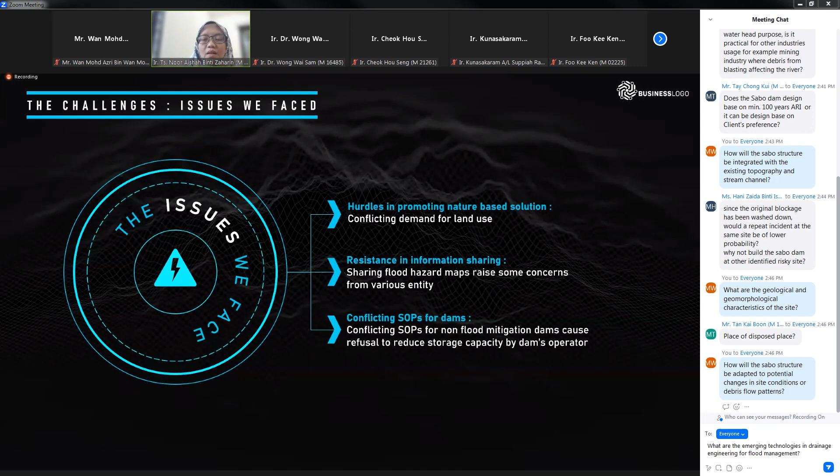Number one, we have to shift from a reactive to a proactive approach. When we talk about this, JPS can't stand alone. Local authorities, developers, state government - all of us have to work together, because flood management is not solely about structural measures like bunds, bypasses, floodgates, or water pumps. We also have to look into land use planning and river reserves. All these things need to be looked at together holistically. There must be a shift from reactive to proactive approach.

Option two, highlighted by the team, was to strengthen knowledge and data sharing, sharing models across jabatan, across agencies. That was one of the option recommendations given by the team, as well as sharing flood hazard maps with the public.

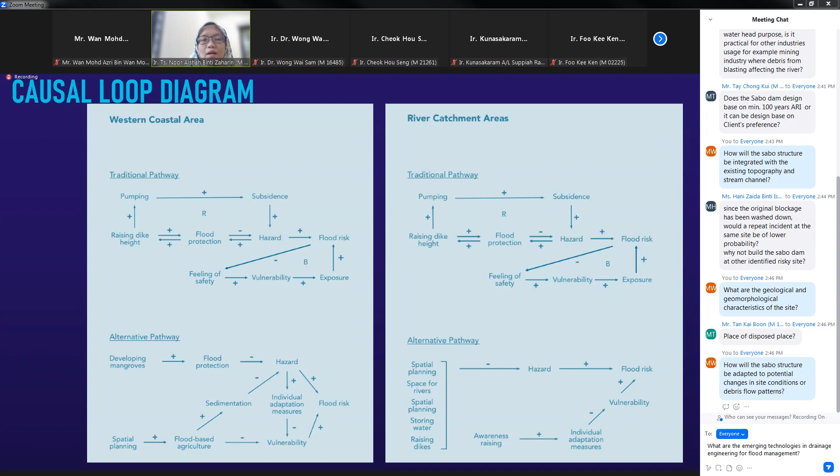I would like to leave you with two questions before I end my presentation. The first is, do you think we live better than our ancestors now? I'll leave you with this question. And the next question would be, will our next generation live better in future with what we are doing now?

As we are the engineers, we are the ones who are going to build all the dikes. We are the ones who are going to build all the bunds. We are the ones who are going to propose all the river diversions. Will we leave them a better world for them to live in, in the future? So with this, I thank you.